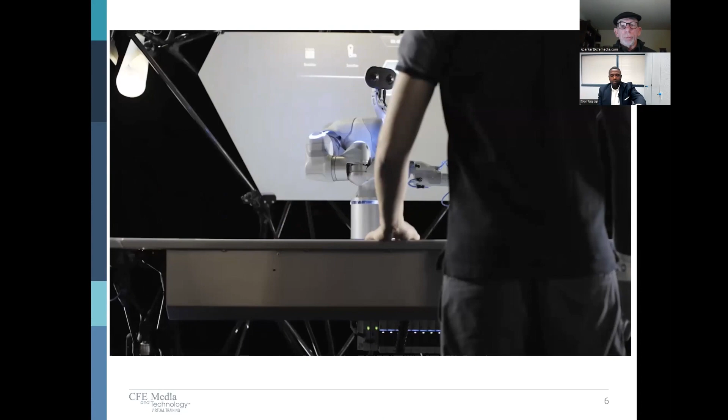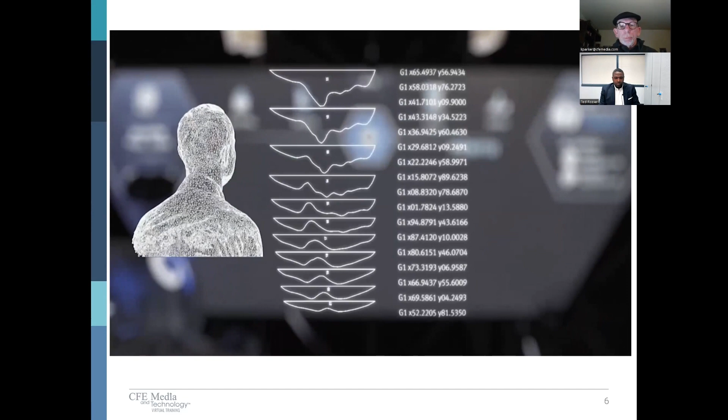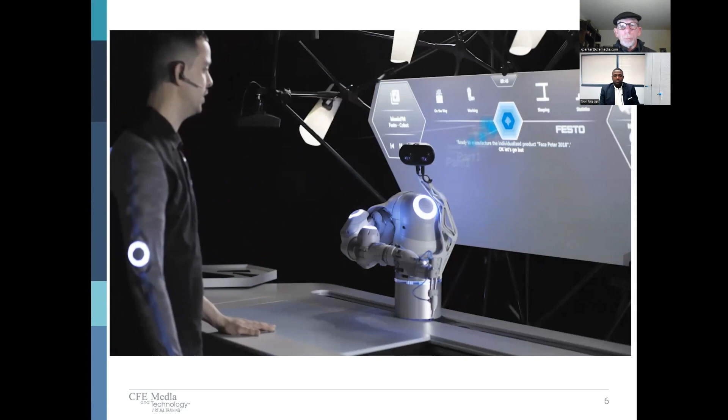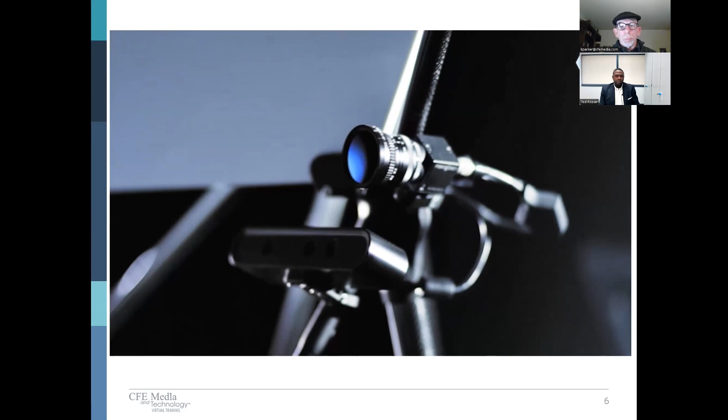Ready to manufacture the individualized product Face Peter 2018. Okay, let's go. But let's make the stand first. Starting cutting process. Okay. Okay, thanks.

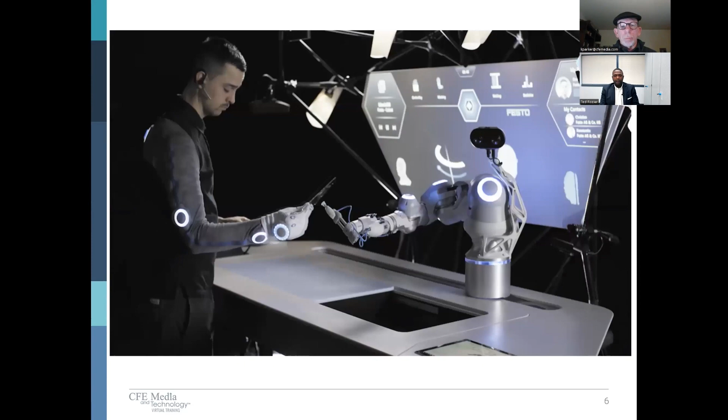While watching the video, I'm sure you all noticed a few technology tools that are considered new to the manufacturing floor of the future. You may have noticed an autonomous mobile robot. You may have noticed the collaborative robot, which we like to say collaborative automation versus collaborative robot, but we'll talk about that a little bit later. And then you may have also noticed the 3D vision system.

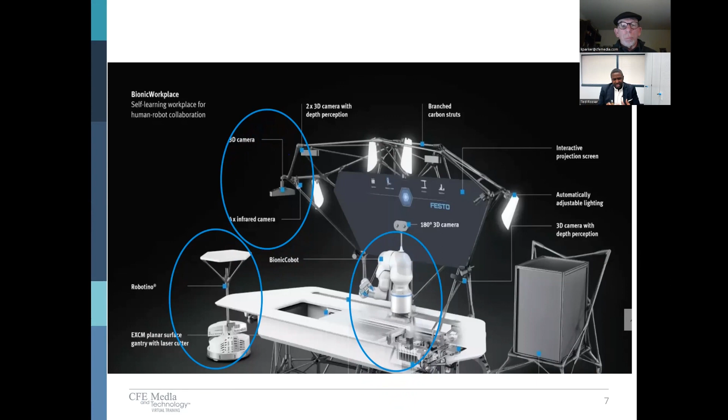When it comes to the power of connectivity, it's all about the control architecture as well as the term interoperability. It's the special sauce in the background that connects all this technology together so that the human being can work very nicely along with it.

But what we want to do with Industry 4.0 is make sure that we're all on the same page. So let's go on that journey together. So when we think about 4.0, of course, we have to get there. So we start with 1.0. The first industrial revolution moved society from manual to mechanical by harnessing steam and water power and replacing raw muscle and strenuous craftsmanship. This marked the end of the 18th century. So the overarching terminology of this phase would be called Industry 1.0, mechanization.

Now, moving on to 2.0, the second industrial revolution took advantage of electricity and the assembly line to generate mass production. This marked the start of the 20th century. The overarching terminology for this phase would be called Industry 2.0, electrification.

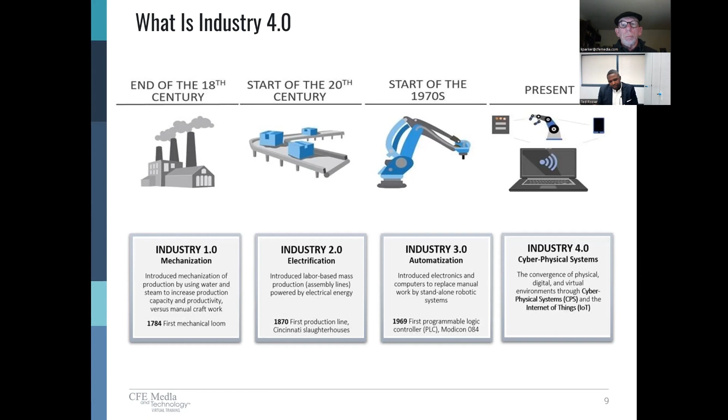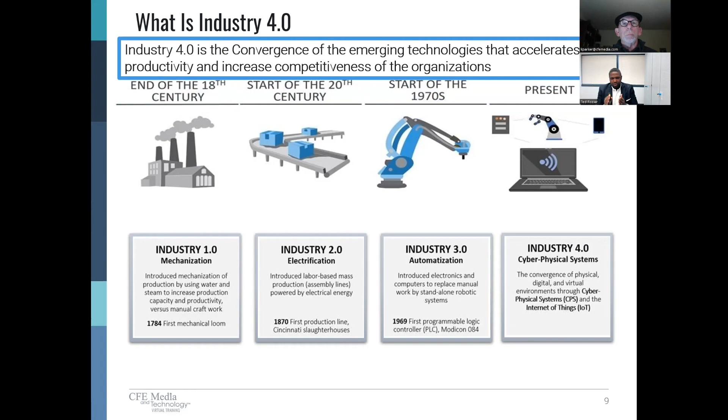So that's the overarching terminology, Industry 4.0. I'd like for you to keep cyber physical systems in the forefront of your mind as we move forward. Let's erase the buzzwords and keep Industry 4.0 cyber physical systems at the fore of our minds. So what is cyber physical systems?

Cyber physical systems are the integration of physical processes, computation, and networking, collecting and harnessing a tremendous amount of data to make better decisions. In the end, collectively, the data should tell business leaders in all disciplines, from the top floor to the shop floor, what to do and when to do it. And that's where interoperability comes in. Cyber physical systems should tell you what to do and when to do it. There has to be true connectivity from the equipment to visualization and to the human being.

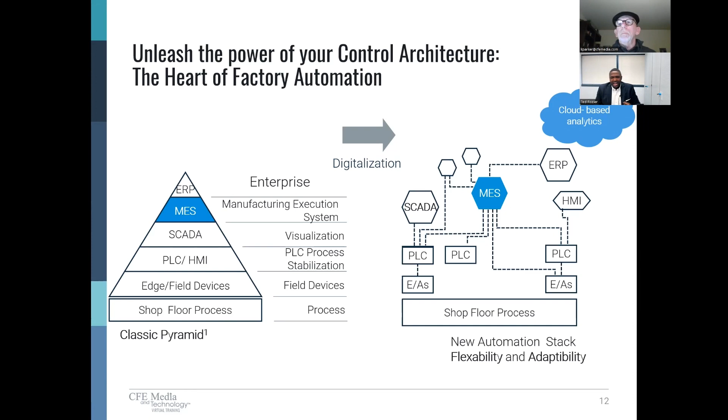That's why you see on the right-hand side that this is where we're shifting to a more flexible and adaptable control architecture that's connected to a cloud for analytics to be stored. The data can be correlated there, and everyone should be able to reach that data at all times.

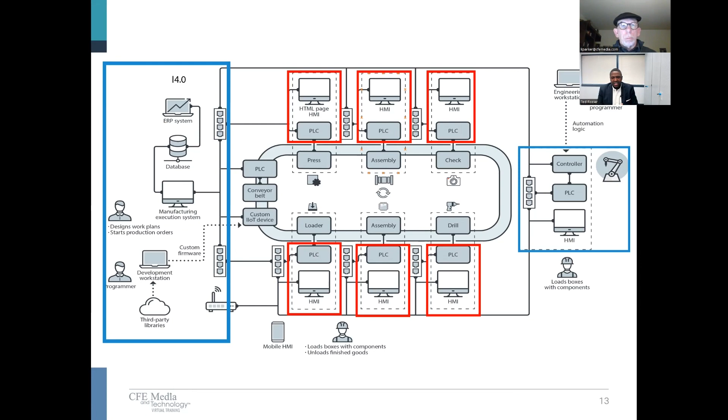Now, something else very important when we talk about Industry 4.0 smart manufacturing would be the Digital Transformation Maturity Index. We've talked about the hardware and the control architecture up to this point, but the maturity index — there's something to keep in mind, and you hear this a lot: sometimes we connect Industry 4.0 and digital transformation as the same thing. It's not the case. Digital transformation is when technology, process, and organizational culture are aligned to impact business models and create new revenue streams.

Phase 1 is all about the 2 C's, computerization and connectivity. Now these two work together. A good example would be a CNC machine.

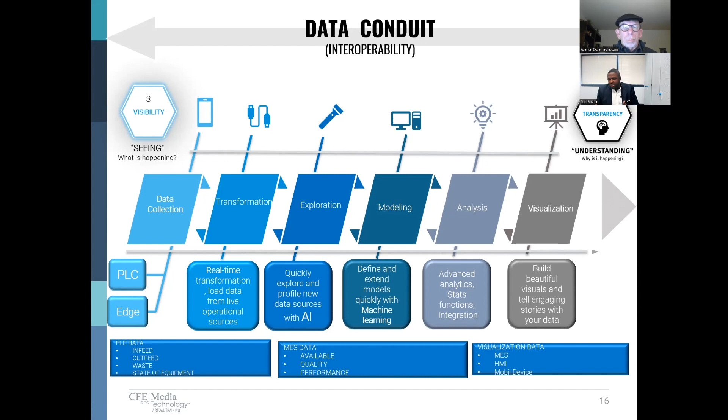Those would be questions that we would be asking if we're going on this journey and we're connected to a true cyber physical system. In the end, our number one goal is to take all the information that we are collecting and make sense out of it. So we don't want dark data. We want information where we're able to connect it. And when we have interoperability through the data conduit, we can push and pull information that's going to make our manufacturing process rich and lean.

In the end, what does it look like? Well, if you look at your control architecture and we bring that to life a bit, this image shows that we want to, at the shop floor, capture. Then we connect. Then we convert, we network, distribute, and consume all the way up to the cloud. That's what that connectivity looks like. So hopefully this image will reside well in your mind, helping you to see what it looks like when we are connected from the top floor to the shop floor.

The only thing that's missing is the human being that's capturing this information, consuming it, and making changes to the operation. We'll talk about that some more as we move forward.

Keeping in mind that a true cyber physical system, there is an autonomous response in the end. And that autonomous response, a great example of it might be an AMR, autonomous mobile robot.

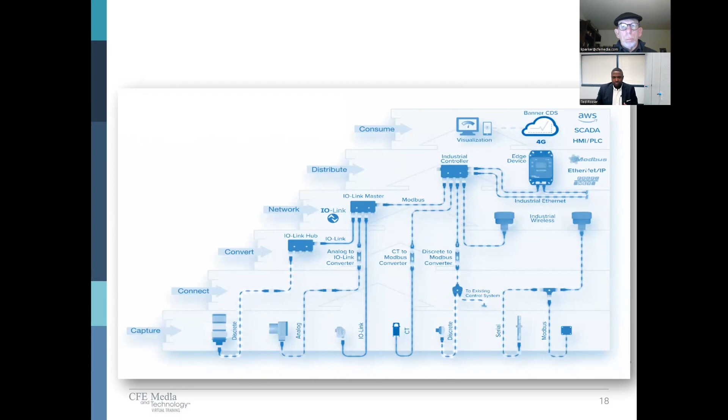So when we think about decisions being made by automation, we talked about the heart of Industry 4.0 and cyber physical systems being MES. Let's learn about MES and how MES has the ability to interact with the shop floor. We're going to watch a brief video here, about 5 minutes, so sit back and enjoy.

The enormous rise in the quantity of data and the complexity of networking a plant requires developing systems that make the flow of data easy to handle. MES is what we call a manufacturing execution system, and it is the heart of Industry 4.0.

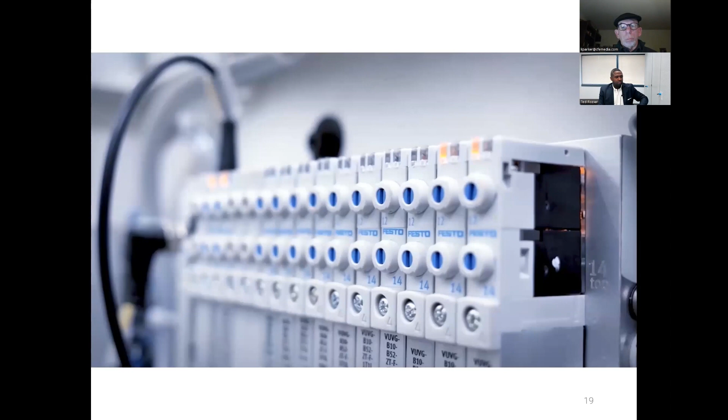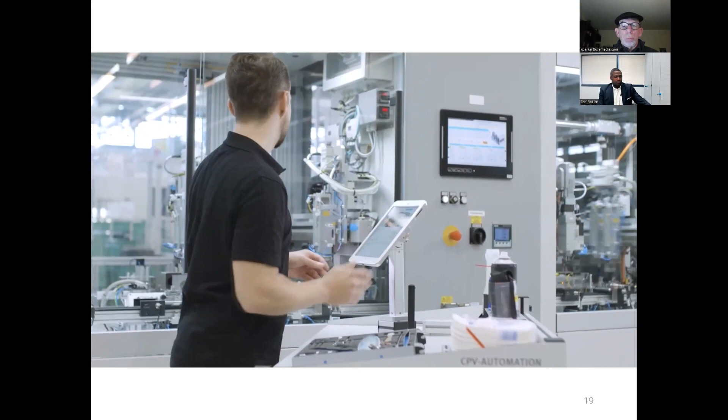This is the layer of controller software that truly connects the top floor, which is your ERP, your Enterprise Resource Planning System, into your actual production shop floor process. The true value of an MES is that you have full interoperability, meaning the shop floor communicates to the top floor. Decisions are made, and that goes back down to the shop floor for implementation instantaneously.

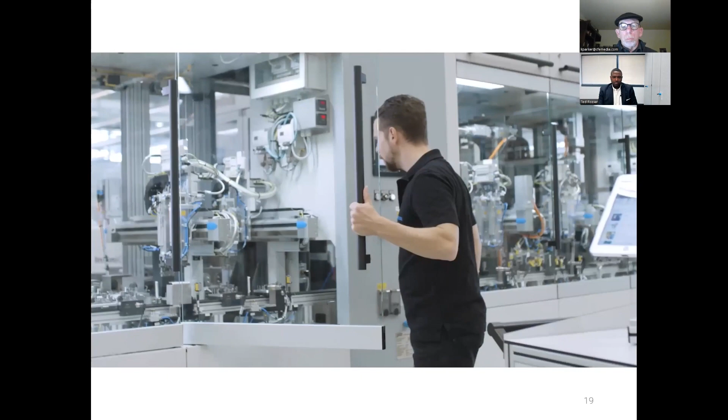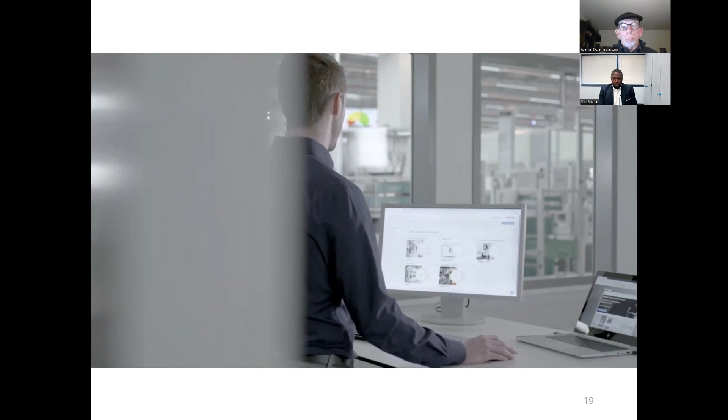This takes all of your data, smart sensors, your condition monitoring, as well as your customer production orders, and combines that into a system where we can have dashboards and see what our cycle times are, what our idle times are, and how much energy we are actually consuming.

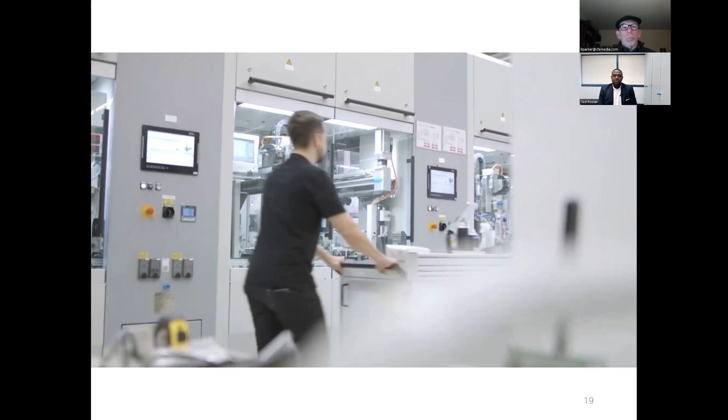It's very important that skilled workers understand intelligent components in order to operate and optimize their facilities. It's also important that they learn not only the structure, but also know how to program the digital facility networks. With the CP Lab, we've implemented MES4, which has all of the same functionality of an industrial MES.

But it's built for the classroom, meaning it's easy to implement with an easy user interface, but it still gives you that full interoperability. It still gives you the capability to export data and make decisions, to do data analytics.

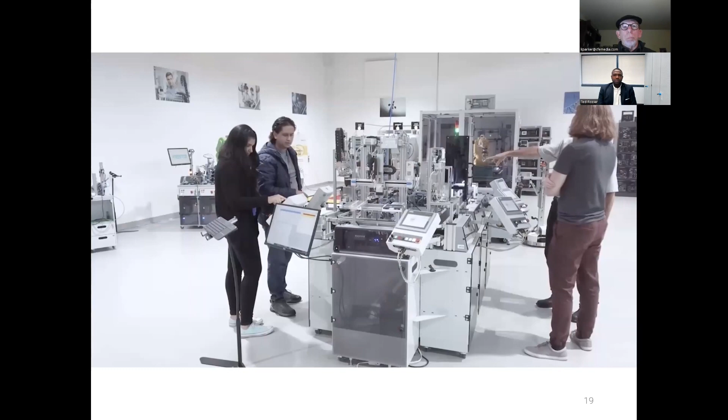With this interface between research, production, and training, Festo Didactic works on providing learning systems and curriculum which students and skilled workers can prepare themselves for digital production, and the CP Lab can get you there.

So what did we learn? Our Industry 4.0 training solutions come well equipped with all the tools needed for success today and tomorrow.

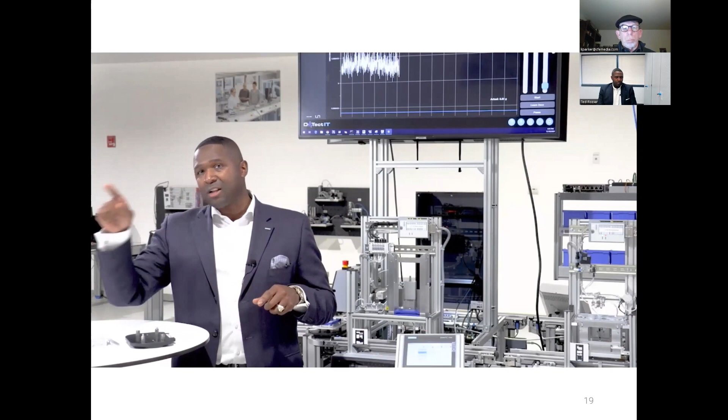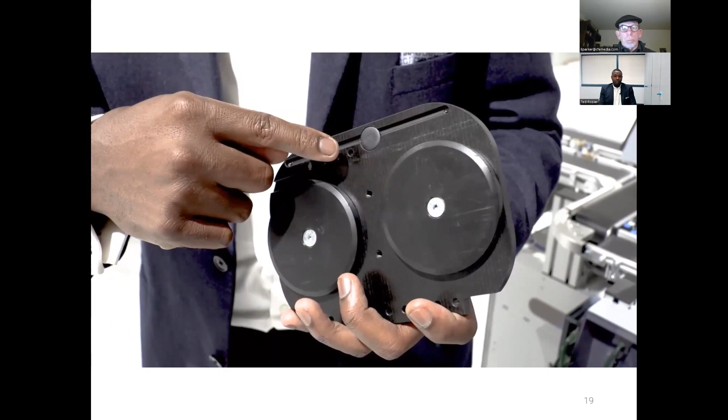Let's start off with the RFID chip that is embedded inside of each carrier, which allows us to push, pull, and store 128 bytes of data on the chip.

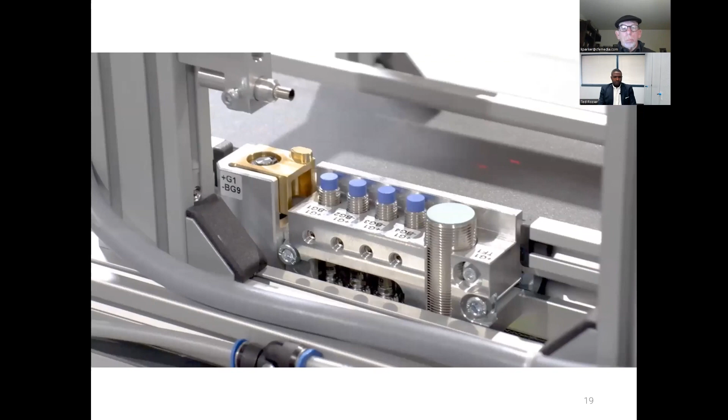Now, at each station, we have what we call a stop gate. The stop gate consists of 4 digital proximity sensors. These recognition sensors allow us to collect binary data in clusters for part type management, as well as an RFID sensor.

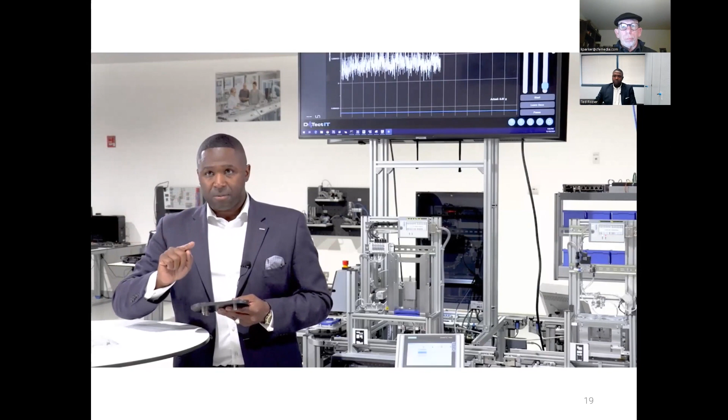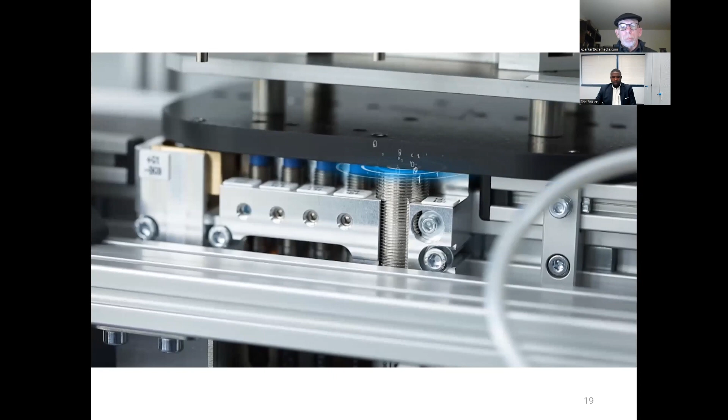We also have an air-driven stop gate cylinder, which is basically an actuator that stops the part when it comes in, or the carrier when it comes in, and then allows us to push and pull that data like we talked about earlier.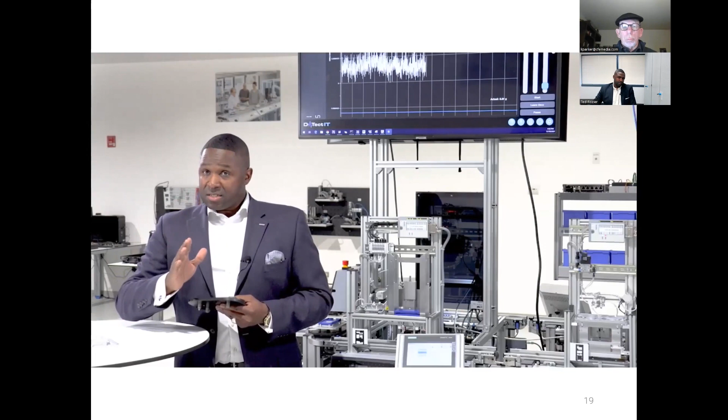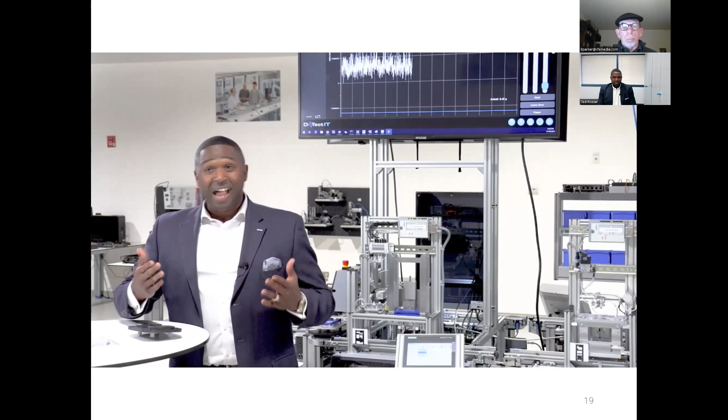This means that at every station the carrier stops at, we have the opportunity to query the MES and ask the part, what's happening? Remember, that has to do with visibility. And then after what's happening, we have the ability to say, why did it happen? And that's transparency. Let's now see the system in reality.

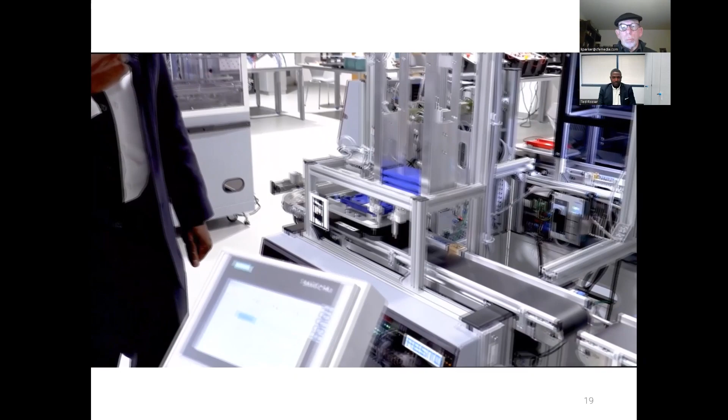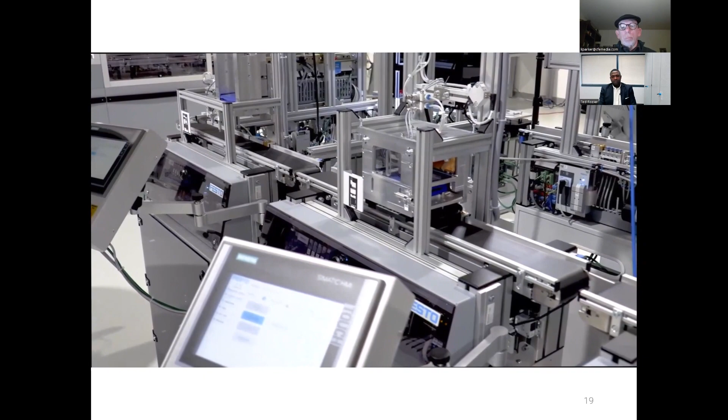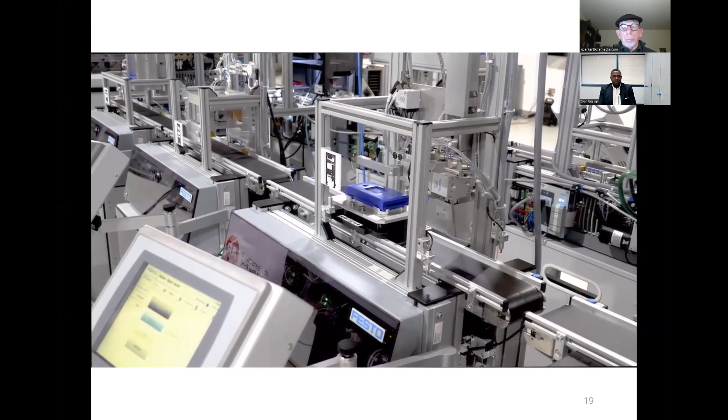The part will enter the magazine station and put one part on top. We now enter into the pressing station. Once the part is pressed, it moves over to the turnover station. Keep in mind, at each station, we are pushing and pulling data. The final station would be the labeling station.

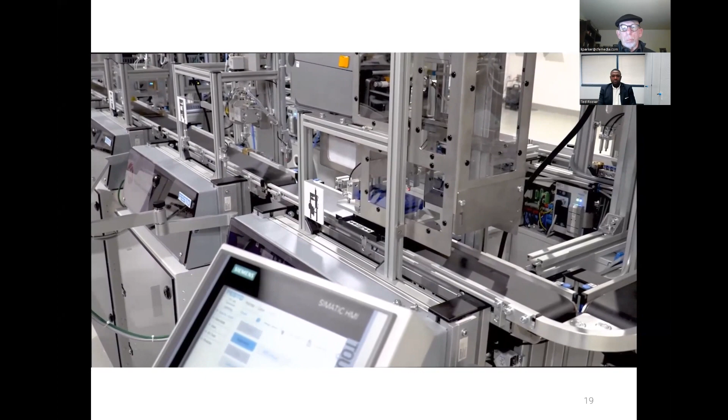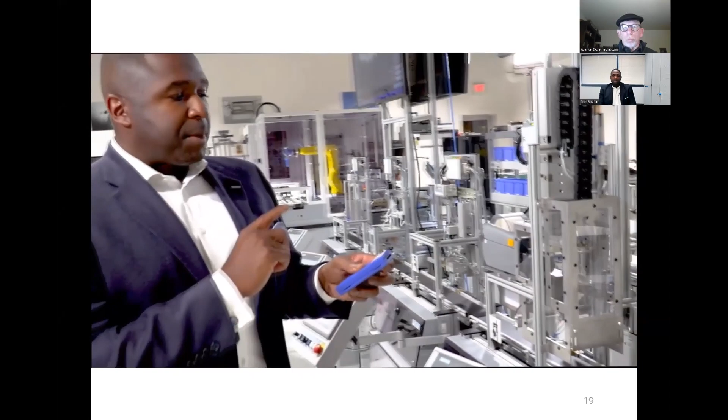I'm going to remove the part from the process. Typically what would happen is the part would be packed out. But let's get back to what we're talking about here: traceability.

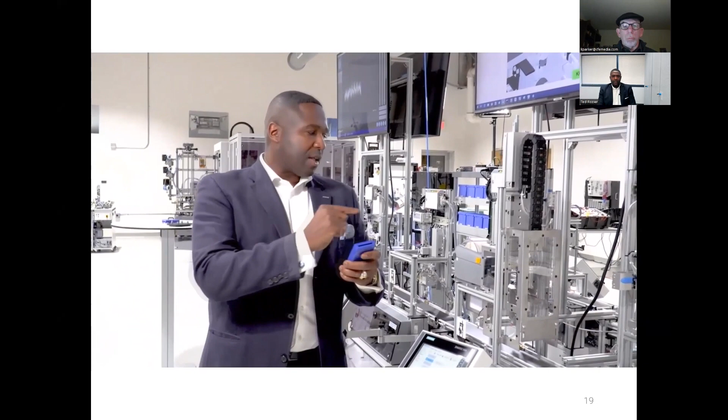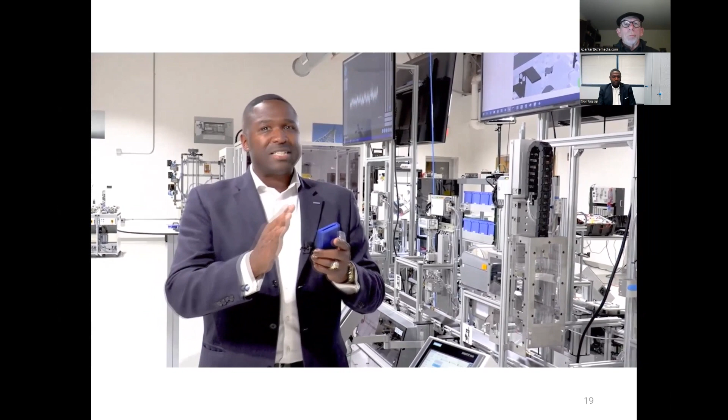So at the labeling station, what happened? A QR code was placed onto the part type. The information on the QR code comes from where? Our MES platform.

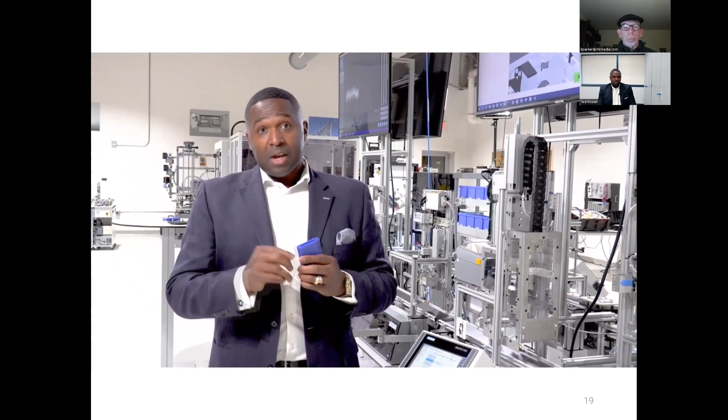So you can see that when we talk about traceability, it takes us back to our maturity index. That second phase clearly defines visibility to transparency. And what sits in between both of those? Traceability. So the MES platform speaks to the RFID, and we push and pull there.

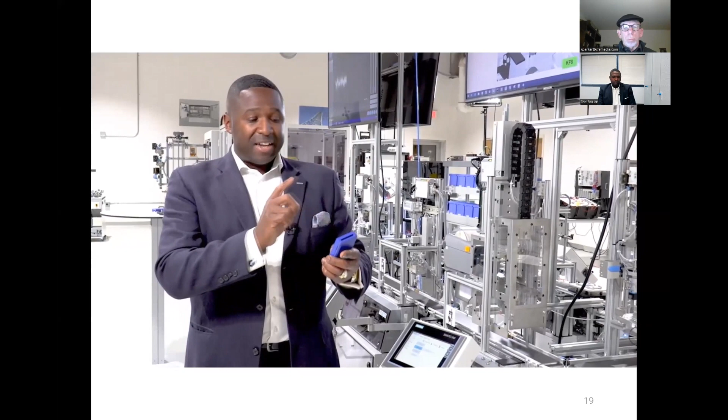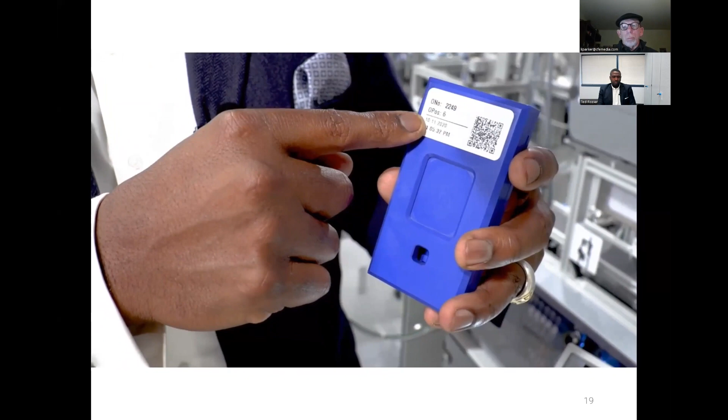We also get a chance to speak to the label maker and define what goes on the part. We get a chance to view the QR code, as well as the timestamps, the order number, and the order position. With all of this technology blended tightly together, Festo Didactic is sure that we have the most powerful tools for today and tomorrow.

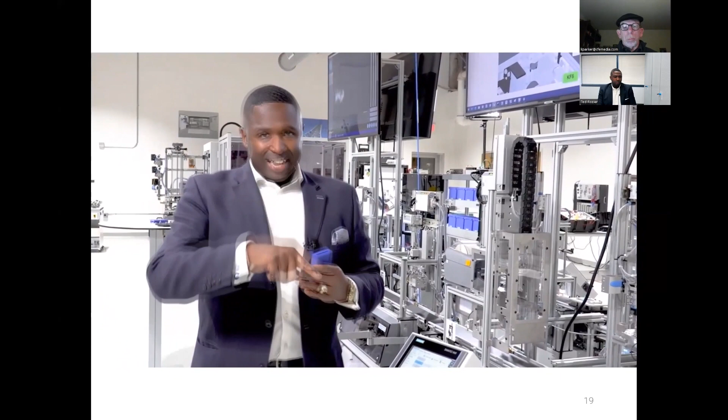So if we just clarify a few key points that we talked about in our cyber physical lab, is what you saw on display. And that platform, we really call it a playground for Industry 4.0 methods to be exercised and validated.

But in speaking about the MES4 software in helping and how it helps us to overcome shop floor challenges, what are we looking to get from an MES? Real-time machine data collection, edge logic, data transformation and integration, overall equipment effectiveness reports and other KPI calculations, database, and IT connectivity and cloud connectivity.

Now, when we think about OEE, overall equipment effectiveness, I just want to make sure it's very clear what we're looking at. This was something that was invented in the 1960s by the founder of the Total Productive Maintenance, TPM system. So OEE is a key performance indicator calculated by manufacturing companies to measure manufacturing performance.

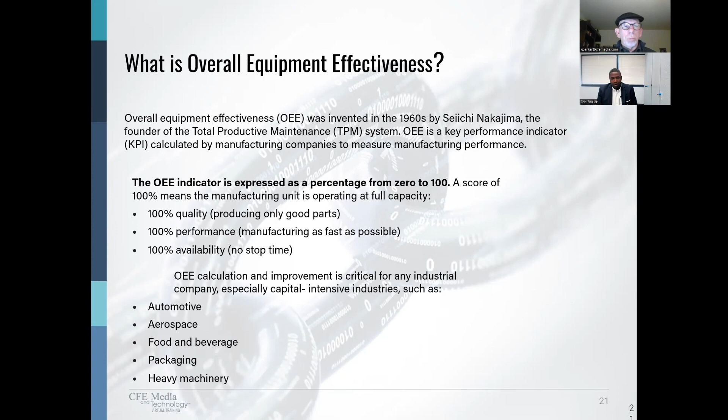So we think about that formula, and just like Ohm's law, there's a formula for OEE: it's availability, performance, and quality. Availability, performance, and quality.

Number 3, visibility, transparency, predictability, and adaptability. Well, you see, people have to move right along with technology. Our behavior has to move with it. We have to learn to trust the data. So it's not just about technology taking off, but the training of individuals also must sit side by side with the technology. So let's talk about what that looks like a bit.

People on the shop floor and job roles. So when it comes to job roles on the shop floor, the first thing we're going to talk about would be the technology roadmap that an individual would go down, the path from A, B to C. Noticing that the first thing that we're going to look at when it comes to that journey, an introduction to Industry 4.0. So what is Industry 4.0?

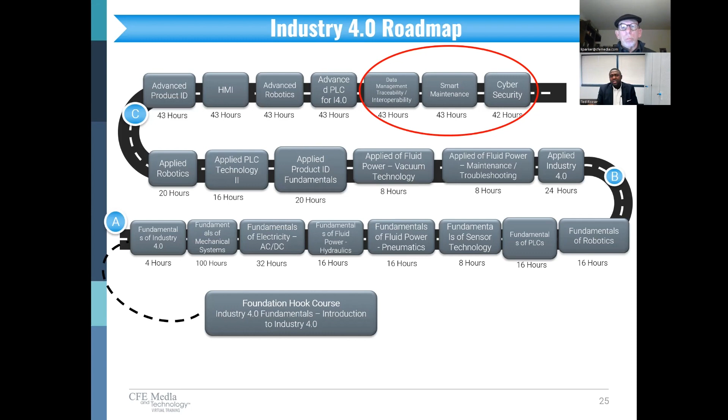So you may recall we started our discussion watching a video, the connected worker. That would be the production specialist. As we start to transition and go on this journey, converting manufacturing plants from brownfield to greenfield, individuals are not losing their jobs. The systems are talking to them. Operators are now production specialists.

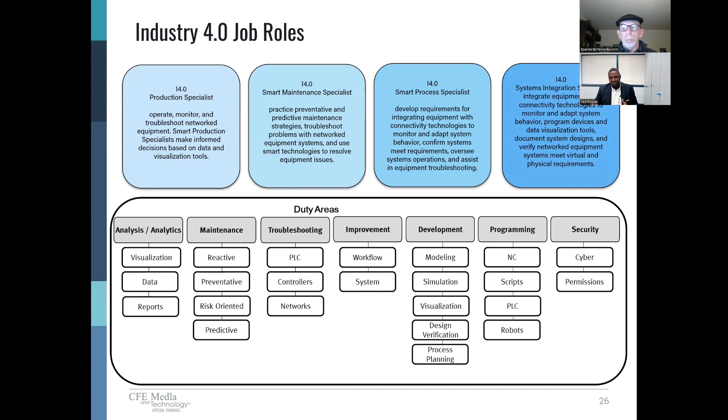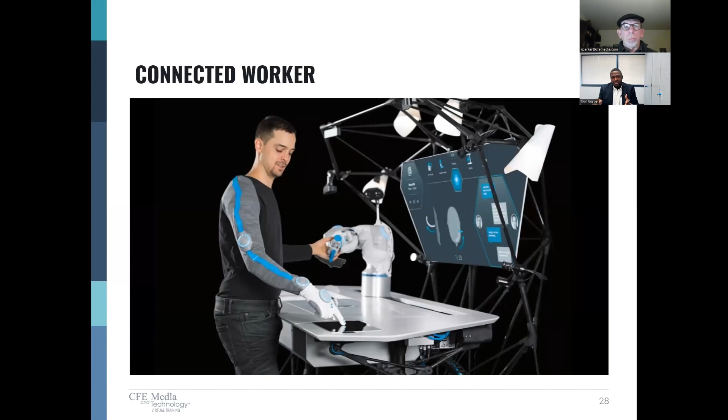So what are some additional tools to empower the connected worker, the production specialist? Well, if you recall back to the video, there were several tools being used. There was a collaborative robot, which we're going to talk about, or collaborative automation here. But you see that connected worker also has the ability to use a tool called augmented reality. This tool of augmented reality is where we suggest education and industry start their Industry 4.0 journey.

If someone were to ask, okay, I'm ready to get my classroom Industry 4.0 ready, I want to start right now, the same for a manufacturing plant, we would always say augmented reality. And why is that? Augmented reality connects the worker. It's almost like we talked about an Ethernet cable and an Ethernet switch. You plug the two together, and you're able to push and pull bytes of information. Well, if a human being needs information, do we take that Ethernet switch and plug it into the human being? Of course not, you can't do that, but you can use augmented reality. Augmented reality is almost like plugging that Ethernet switch into the human being, because it's going to give that frontline worker, the connected worker, data immediately.

Now, some may argue that when you talk about augmented reality, the student doesn't learn all the core competencies to make great decisions. Augmented reality must be designed in such a way where it helps the production specialist or the operator.

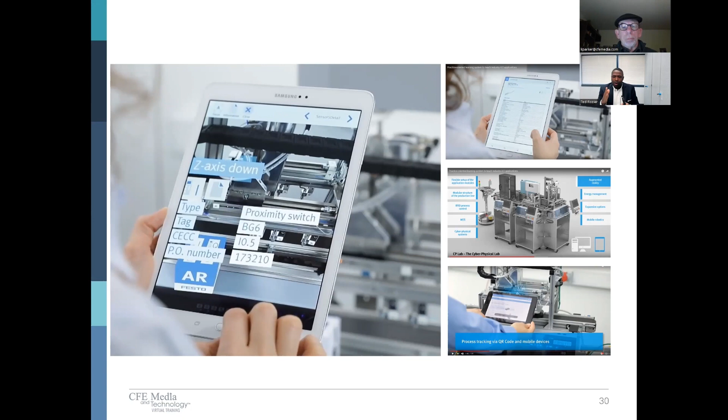Now we're going to get into the portion that we're talking about robotics. So when you mix the system approach, data management, all together in one, we can easily start to think about the future. And we can get very excited and forget about the risk assessment, which is what I'm trying to get here. When we talk about the factory of the future, do we need to consider a risk assessment?

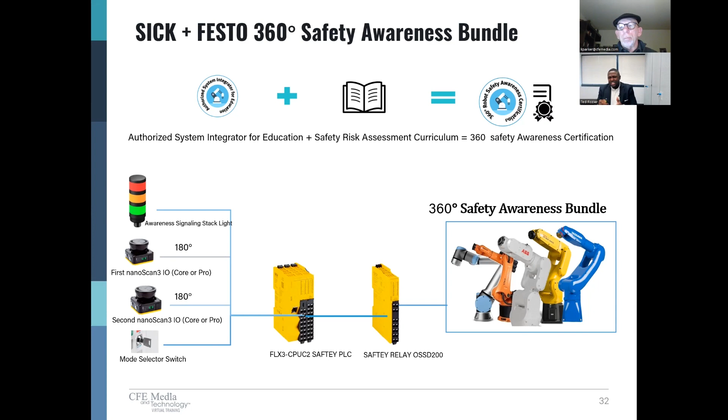Absolutely, we do. One of the ways to consider the risk assessment, we like to take students and incumbent workers on a path of a safety awareness bundle. Festo works very closely with our partner SICK. In some educational facilities we have the safety awareness package: area scanners, a safety PLC, a safety relay that can be attached to any robot, industrial or collaborative. Combined with the curriculum that goes along with it, it starts to teach the student what safety and a risk assessment looks like.

Safety has always been taken very seriously at Festo, and Festo follows what we call the V model. The V model gives us structure to make sure that our automated processes, the build of valves and systems, always provide a safe machine. The V model aligns with several of the protocols used for safety.

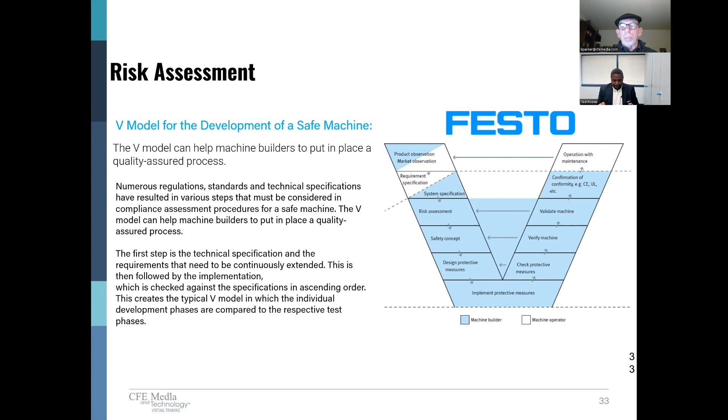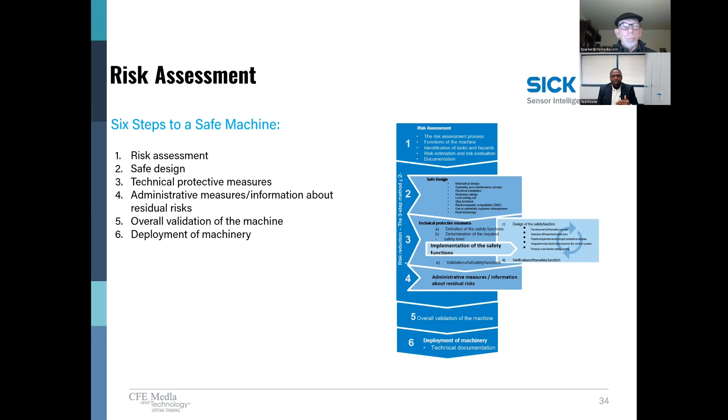We work very closely with SICK. We looked at the hardware components, but what does the software look like? If you take the V model and then take six steps to a safe machine, that would be: risk assessment, safe design, technical protective measures, administrative measures, overall validation of the machine, and deployment of the machinery. Those would be the six steps to a safe machine.

What Festo and SICK have done together is combine these two concepts and provide a strong risk assessment, which is a safety awareness tool. It trains students on risk assessment so that it's never forgotten on their journey into a cyber physical system, into a smart manufacturing space.

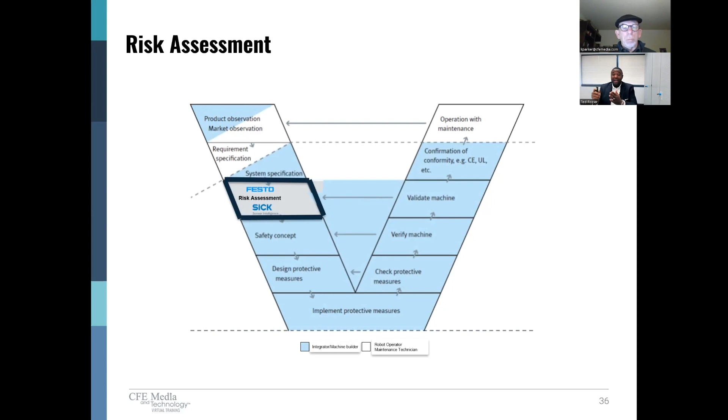So how does it work? We start off with the job roles. Here we see who the users are: is it the robot operator or a robotic maintenance technician? Then we go into the task. We look at normal operations, stocking and restocking, the load and unload of material. That would be for a robot operator. What are the differences in their roles? The robotic maintenance technician does periodic maintenance, troubleshooting, problem solving, clearing jams, and cleaning machines. So we consider risk assessments per the operator or per the user.

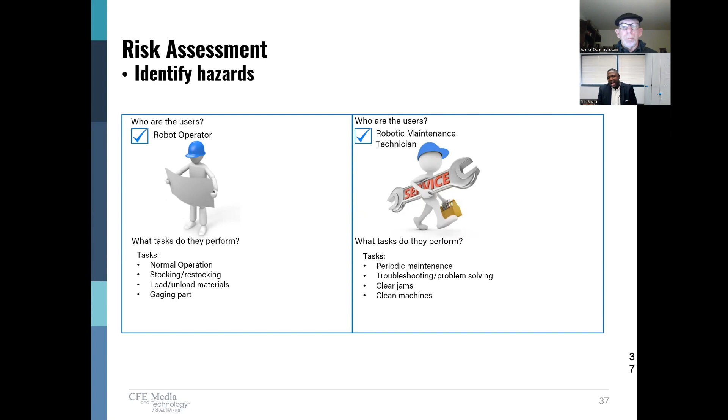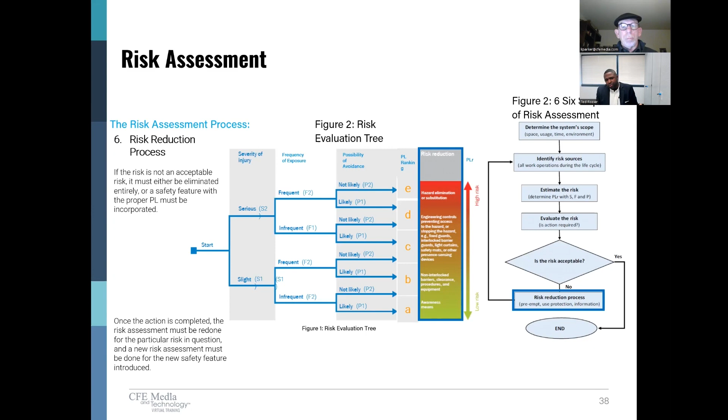We look at what tasks they perform, and then the student can take those tasks and look at the risk evaluation tree. When we talk about a risk evaluation tree, a lot of times you look at this screen and there's a lot going on—it might even put an individual to sleep. But if you walk the student through these processes and help them on their journey, they actually will get pretty excited, because we define clearly what the risks are.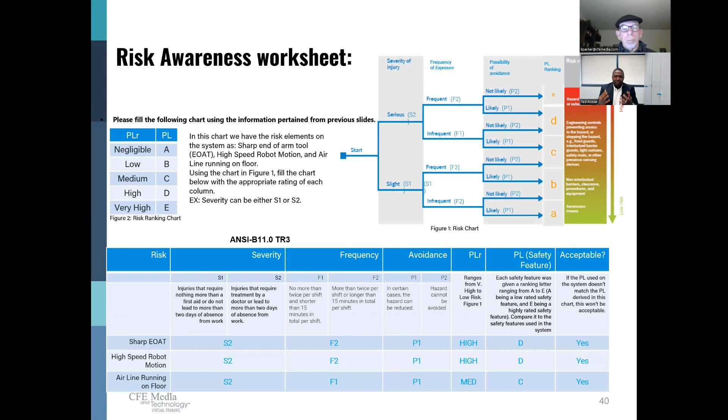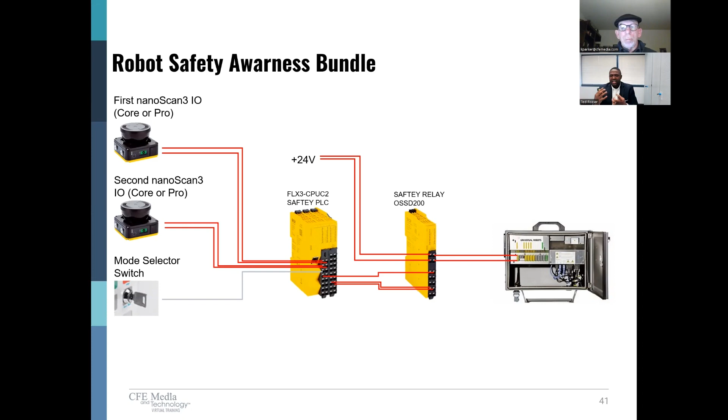Just so we're clear, the safety awareness bundle includes two area scanners. One area scanner covers 180 degrees of a system, the other does 180 degrees, and together you have 360 degrees of protection. Students learn how to connect those area scanners to a safety PLC, a safety relay, and then tie it into any robot. Here we have a universal robot control panel, but Festo works with all robot manufacturers. This safety awareness kit allows us to put a safety suit jacket around any robot, tie it into any robot, and now they have learned those safety competencies.

If I know there's a human being close to me, now that system starts to react totally differently. It's acting differently because it's a collaborative system, so it knows a human being is there. So maybe the speed of the robot is cut down to 0.5%.

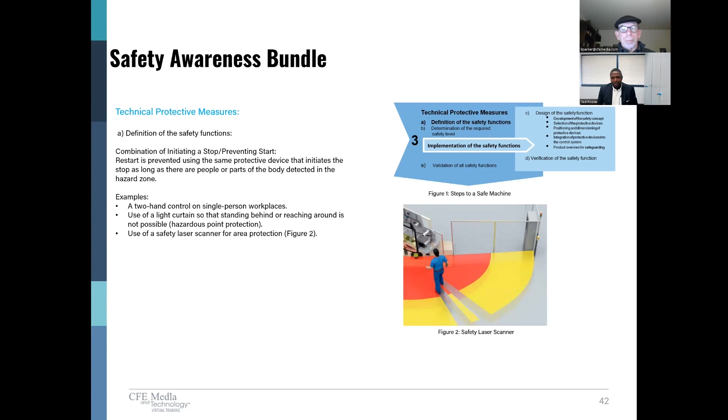And there's another field set, or a zone, that's where you see the red zone there. Now that robot would possibly come to a pause, making sure that it does not affect the human being. Again, the data is being captured at all times, being sent back to the operator. The machinery is always aware of the operator.

So we talked about collaborative robots, and let me not say collaborative robots -- remember, collaborative automation. Collaborative automation, again, takes our mind back to what we talked about in the beginning.

That was the workplace of the connected worker. And there you see the autonomous mobile robot -- Festo calls it a Robotino -- on the left side. Collaborative robot, again, 3D cameras tightly integrated so that the human being works very closely with the automation. A very user-friendly work environment is what the factory of the future looks like.

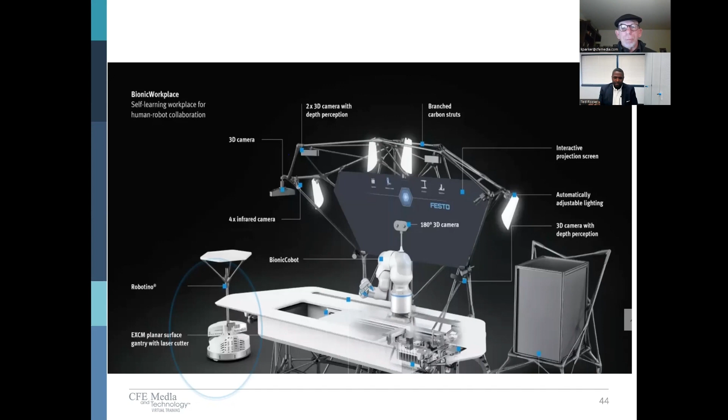When we look at a safe workplace, just so that we get a good, clear picture, we're looking for any sharp edges to be round edges, and that's part of our risk assessment. We're looking for trip hazards again -- that's, again, part of the risk assessment.

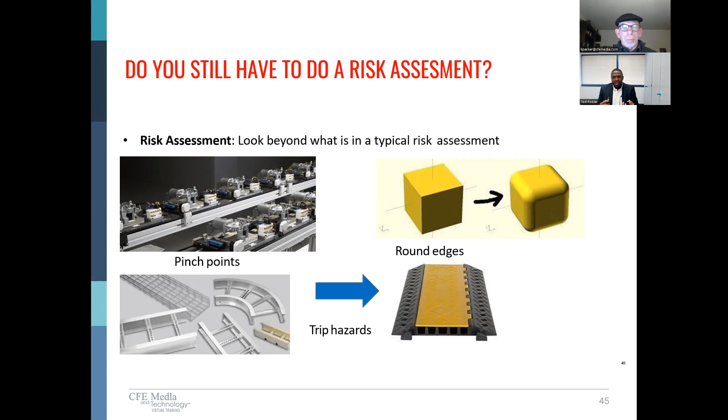So collaborative automation is going to be free of pinch points. Yes, the robot is there, but even the end of arm tooling has no sharp edges. All of that is taken into consideration in the design phase so that in the end, you have a very adaptable process.

Before we end, we're going to look at a few case studies. In this application, this is one of my favorites because the programming of the robot on the left-hand side is not defined before there is a risk assessment. So on the right-hand side, you have a human being that has gone through every phase of handling the part and part inspection. So this application will be called man versus machine.

So on the right-hand side, the human being has a vision application for inspection. Behind him, he has some fuses, and he's going to build up a circuit board. Now, after understanding the risk, the human being handling the operation and the amount of time it takes, we take all of that knowledge along with the risk assessment and we build up the robot on the left side.

Notice that robot has guarding around it. But if you consider the risk assessment in the design phase and you're very intimate to the process, you could imagine you could easily take that, remove that guarding, and apply the safety awareness package -- two area scanners to make sure that you are covering the module with 360 degrees of coverage. And now that robot has the ability to interact with it as well.

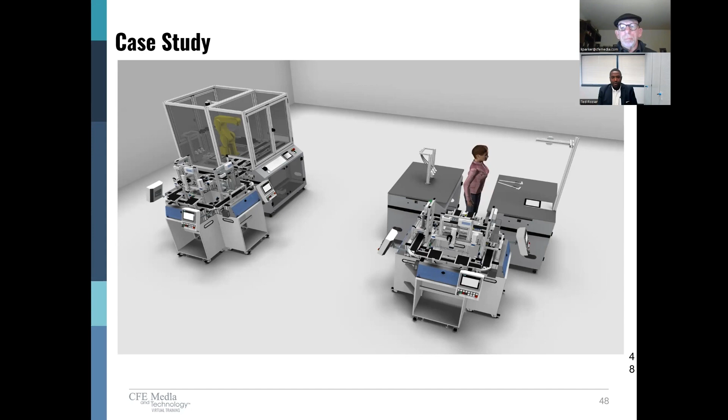Now, another case study would be the programming and integration of safety when it comes to CNC machines. There is a right way and a wrong way to integrate a machine tool, and especially when we think about risk assessment, it has to be taken into consideration.

In order for that to happen, there's a lot that gets done in the communication between the AMR, autonomous mobile robot, and the robot system. There's interoperability, Bluetooth connectivity. So what do we mean by that?

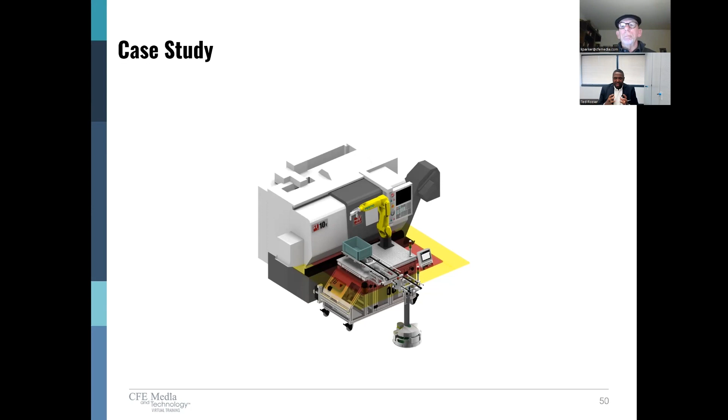There's another case of when you do a risk assessment the right way, considering more technology being added, you're going to be able to collect all that data and make sure that you have a safe work environment as well.

Now, we're not saying that you don't have to have cell guarding integrated into your systems anymore. Sometimes cell guarding is the best thing for the application. But as we move forward into the factory of the future, smart manufacturing, we'd like to get more automation, and that means we need more real estate, and we need to get more robots integrated where human beings can interact with those robots. That means some of that cell guarding is going to go away, and then what we do is we integrate the safety awareness package.

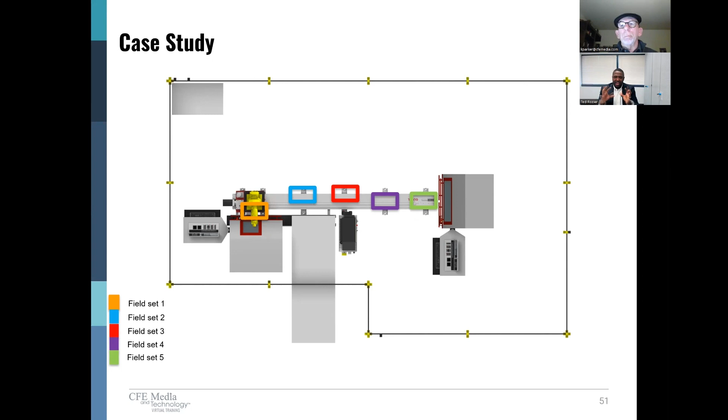Those area scanners, and then making sure that we have a safety PLC, making sure that the integration of the system not only slows down, stops the robot, but captures all of the data. We push that information out to the MES, and now you have a well-rounded solution that will stand the test of time.

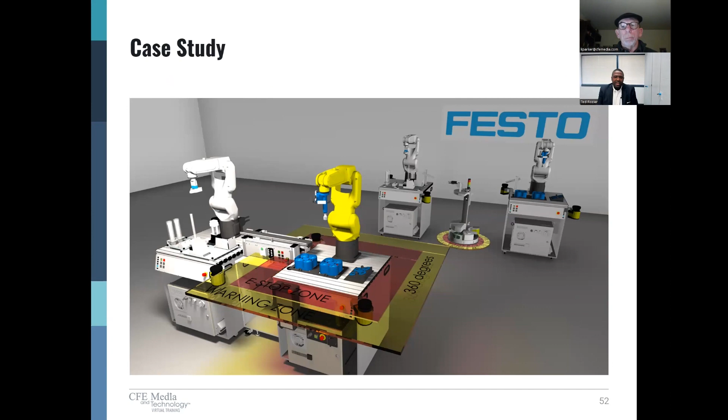It was really nice talking to you, ladies and gentlemen, today. As we wrap up our discussion, the one thing I would like you to keep on the forefront of your mind would be, again, this digital transformation journey. So where are we today based upon our discussion?

Lean manufacturing and the 2 C's, computerization and connectivity. That's where we are now. And there are several manufacturers that are there.

Keeping in mind that if there is an MES platform that sits at the top of a true cyber physical system, what are you going to be able to do? That MES platform is going to allow you to push and pull information, and that information being sent from the top floor to the shop floor is going to be accurate because we did things the right way, with the ability to capture the information. But the other thing we keep in mind is risk assessment. If we do all of this together, keep that risk assessment along with the engineering up front, we're going to have a true smart manufacturing operation. That means our classroom is going to be smart, as well as the manufacturing floor being smart.